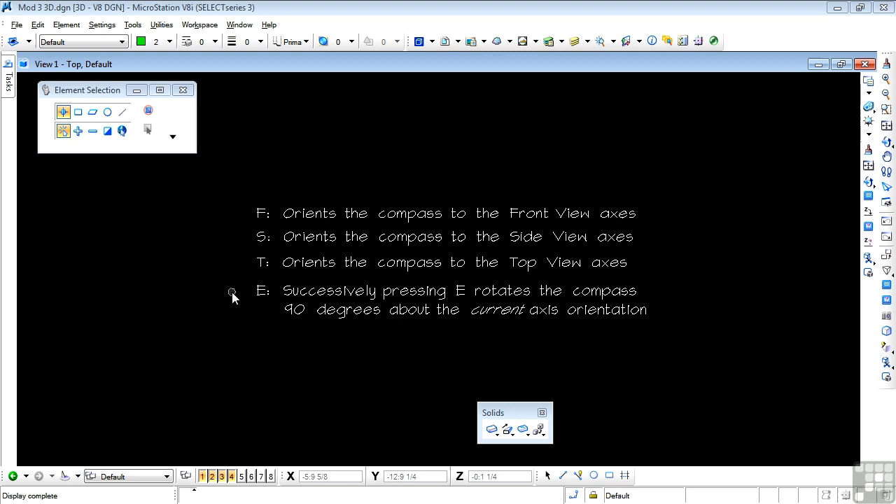Now we'll take a look at E a little bit later. For the moment I want to concentrate on the F, S and T orientations. So I'm going to go to my design cube model, and notice that I've maximized the isometric view for this. I'm working entirely in the isometric view, and I'm going to draw a rectangular box using those shortcut keys.

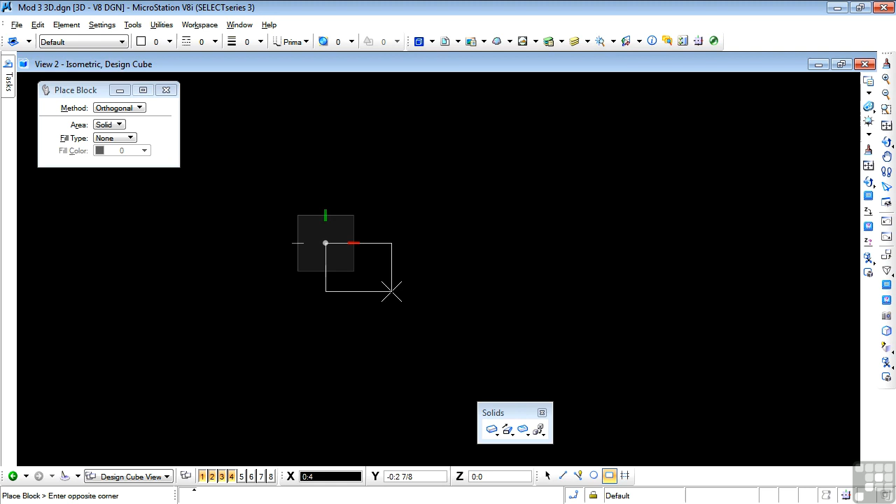So I need to start with my place block tool, and the first orientation I need is top. Now by default the orientation is view, don't want that. Press T for top at the keyboard, compass rotates. I can now draw my rectangle, and I'll use that 9" by 6" one again. So :9, down arrow, :6. There's my 9 by 6, left click to accept that.

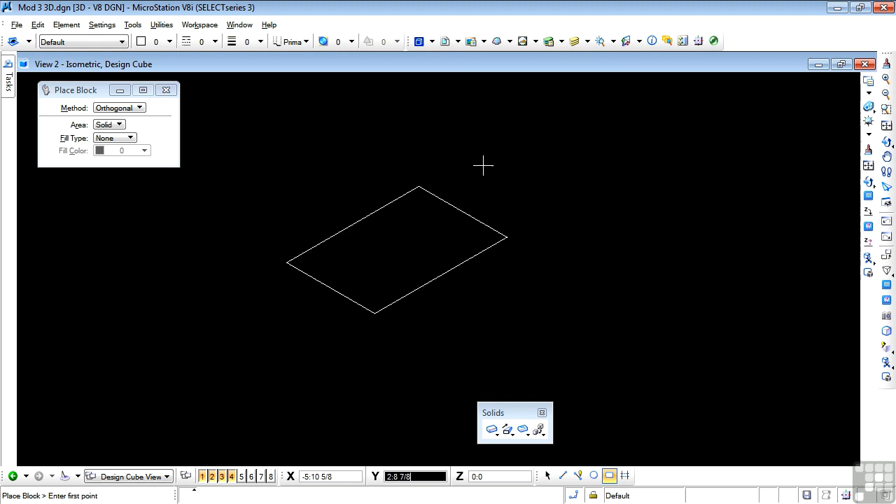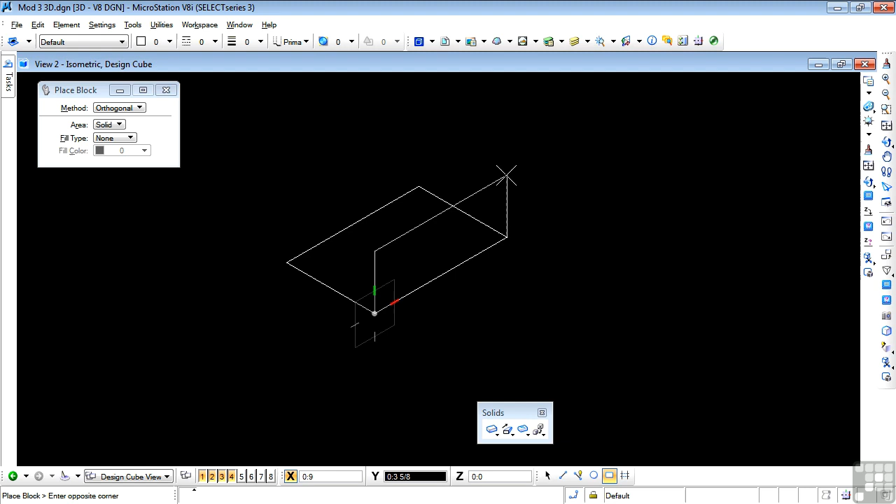Now I want to draw the sides. So I'll start here. I want to draw a vertical side here, but I need to rotate the compass to the front orientation. So F at the keyboard rotates the compass. I can now place my next side. Again, that's 9 inches. :9, down arrow, and let's make this 4 inches high. So :4, or 100 millimeters if you wish. Left click, and there's my side.

Let's try this side now. All I have to do now is select that and snap to that, and we should be away. But the compass is the wrong way around, so I need to go to the side orientation. So S at the keyboard rotates the compass, snap to that corner, and that's done. Do the same thing on this side. Compass rotation is still side, snap to that.

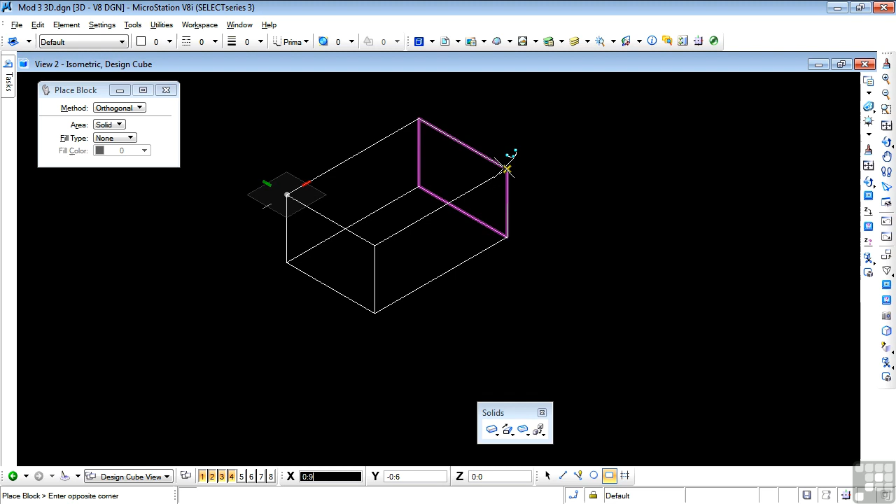Want to do the back, start there. Got to change the compass to front. That gets me that, snaps into place. And let's do the top. Let's close off this box. I need the top orientation for that, T at the keyboard. Snap to the corner, and the bottom of the box, snap to the corner. Now I have a 6-sided box.

Now the really key point here to note is that you are always drawing in the plane of the compass. So whichever orientation the compass is in, that's the plane in which you are drawing. Now that's pretty much true for faces or blocks as we've just done, but lines of course can be snapped from point to point to point without particular regard for the compass orientation if you're snapping. If you're drawing a new line, however, then the compass orientation is again vital because you're drawing in the plane of the compass.

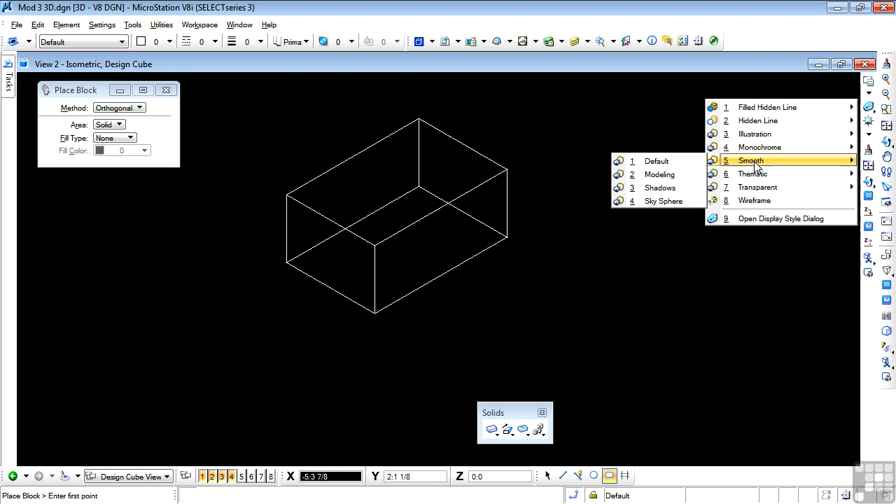Now this little box doesn't look very exciting, so let's add some shading to it. Go up to your View Controls and click on this one, Display Style List. Click and hold, and out will pop a list of available shading options. We want to go to Smooth and Default. And we see our box now nicely shaded.

If yours looks a little dark or a little light, go across to the next tool, which is Adjust View Brightness. Just click on that. And here we can change the brightness of the view itself, which in turn changes the brightness of the object. So experiment with that. That is a nice way of evaluating whether your drawing is working correctly or not.

It's fine drawing in wireframe, but sometimes you can't quite see what the net results are in terms of a solid. Although this is not a solid, this is merely surfaces snapped together, but at least you can see what's happening. So experiment with that a little. Try some of the other possible shading options. Some of them are really quite interesting. And practice drawing using that technique.